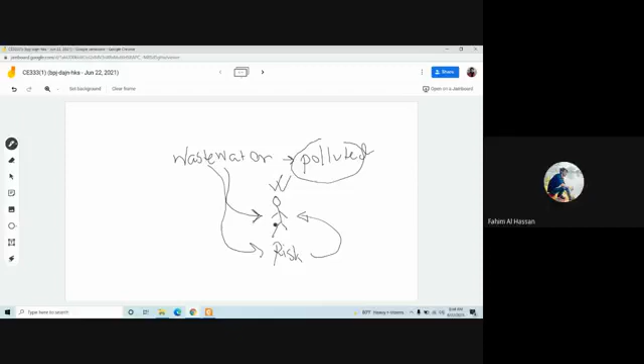Yes, sir. So wastewater can transmit disease. So we need to stop this transmission of disease. That means we need to stop the wastewater from being in contact with human beings.

That means we need to safely discharge it into the environment.

If we directly discharge this wastewater into a river, then the river is going to be polluted. The fish and other aquatic life will be in danger. And you know that a river directly affects the life of human beings. If the river is polluted, then the polluted river will also generate or cause disease.

If the wastewater contains heavy metal, then fish will consume it, and the heavy metal will go into the flesh of the fish. And if people eat this fish, then heavy metal will also accumulate in the body of the people, and eventually it may cause cancer and other fatal diseases.

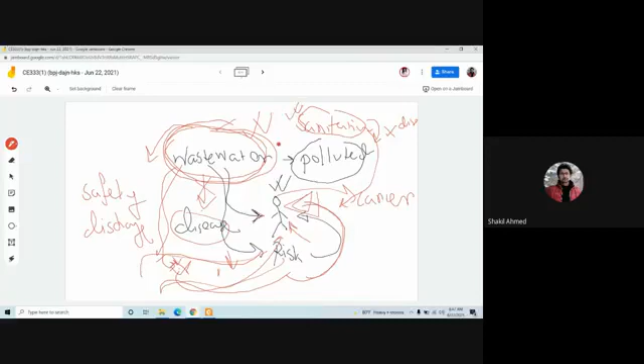Now look at this example. We supply fresh water to a building, right? Now you use it for many purposes, like in a wash basin, in the toilet, in the bathroom, in your kitchen. And once you use the water, then it becomes what? Wastewater. Once you use this water, it becomes wastewater.

Let's designate it by red color. So that's wastewater. That means you need to discharge this wastewater safely as soon as possible, right? And therefore, we need to transmit the wastewater from the source of generation to somewhere else, and treat it - that is, removing the pollutants - and then safely discharge it into the river. Did I make it clear? Yes, sir.

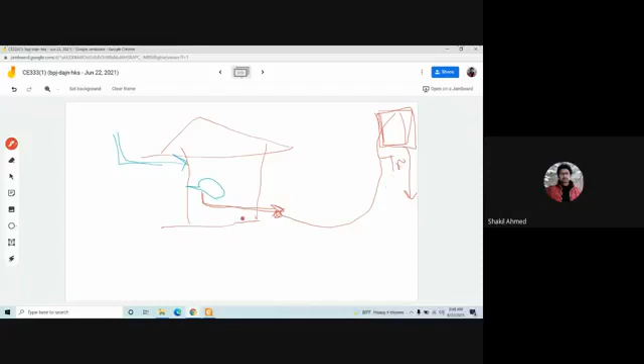Now, for example, the BOD here - you know what BOD is by now. BOD actually represents the amount of organic matter present in the water. So, for example, if BOD in this water is 50 milligrams per liter, the Bangladesh Environmental Conservation Rule (ECR) tells you the maximum limit of BOD of water to discharge into the river is around 5 to 6.

5 milligrams per liter - can you directly discharge this water into the river? No, sir, maximum is 5 to 6. You have 50. That means you need to treat this water, reduce it from 50 to 5 or 6, and then you can discharge it into the river. Clear? Yes, sir. So you have to know these rules and regulations from the Environmental Conservation Rule (ECR).

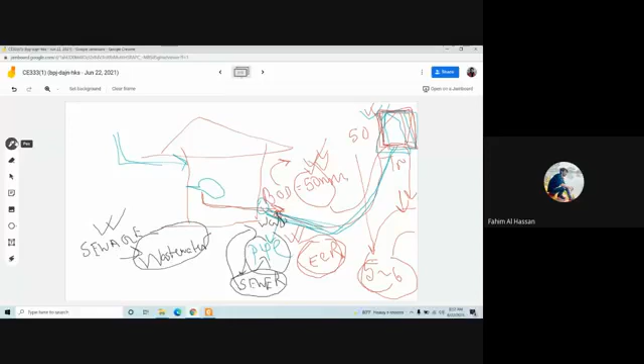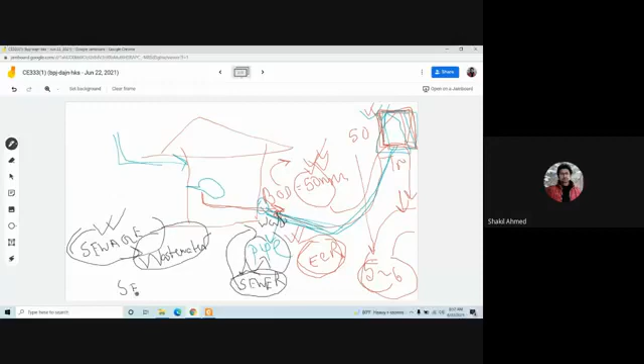Now, this wastewater is called sewage. So sewage is the wastewater, and sewer is the pipe which contains or transmits the sewage. Did I make it clear? Yes, sir. So together, this sewer and this sewage, this system is called sewerage. Clear? Yes, sir.

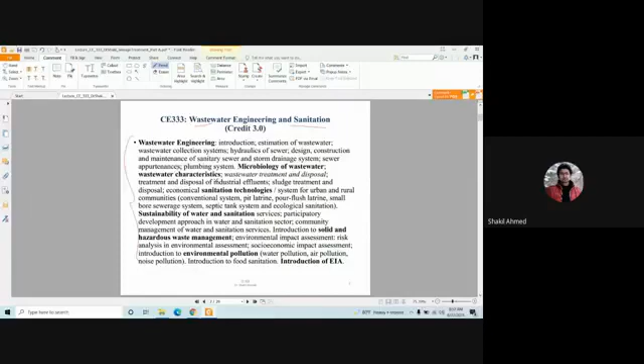So this is the course content. We'll learn these things, Inshallah. I already told you the references. We'll start from here.

Sanitation is one of the world's most urgent issues. The issue is lack of safe water, sanitation, and health. If you want to develop a country, you need to meet the water demand because it's related to child mortality and to the development of human beings directly.

So here comes the role of sanitation. Sanitation is defined as the access to and use of facilities and services for the safe disposal of human waste, so that this waste cannot harm humans. You need to safely dispose of it. That is sanitation.

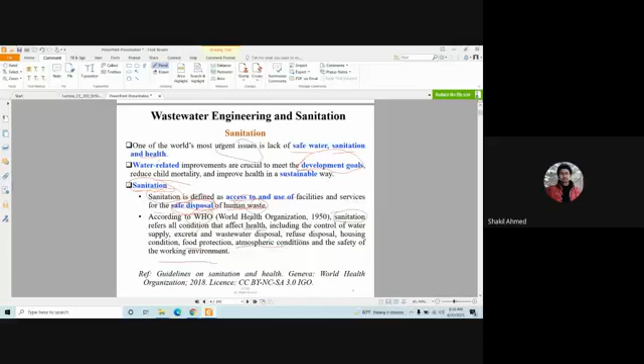According to the World Health Organization, sanitation refers to all conditions that affect health, including control of water supply, excreta and human solid waste, wastewater disposal, refuse disposal, housing condition, food protection, atmospheric condition, and the safety of the working environment. These are all part of sanitation that affect health.

Did you hear the name WASH? W means water, S means sanitation, and H means hygiene. Remember this terminology, you may need it while going for a job interview, test, or exams.

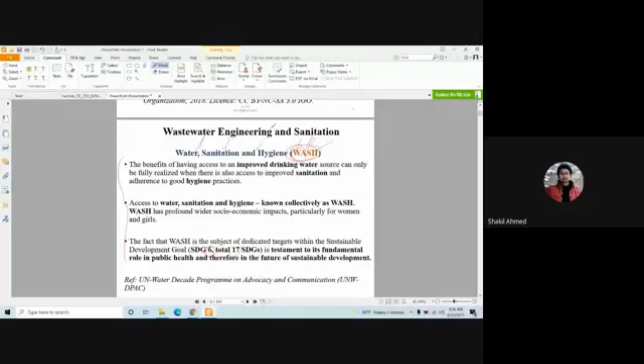The Sustainable Development Goals, SDGs of the UNDP, have a total of 17 goals. Goal number 6 is directly related to WASH, that means water, sanitation, and hygiene. So access to water, sanitation, and hygiene, collectively known as WASH, has profound, wider socio-economic impacts, particularly for humans, women, and girls.

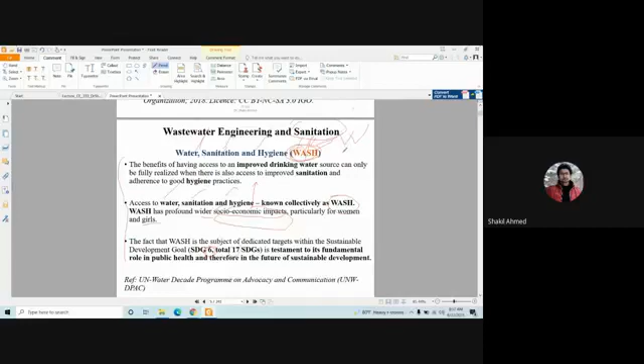So what is the motivation of sanitation? Sanitation has a profound impact on the socio-economic aspects of a country. If you want to generate money and develop a country, you need to protect the health of human beings, and without sanitation you cannot do this. That's why you need to invest money on sanitation. If you invest money on sanitation, you will get more in return.

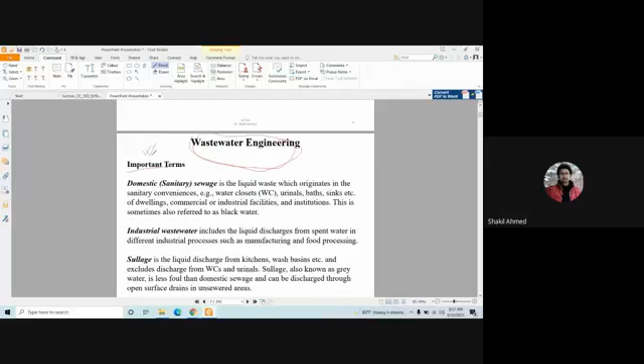So to meet the demand of sanitation, you need wastewater engineering. In this wastewater engineering, we will need to learn some terminologies.

First of all, domestic sewage. Sewage is wastewater, and domestic means it is generated from the household. Domestic sewage or sanitary sewage is the liquid waste which originates in sanitary conveniences - water closets (commodes), urinals, baths, sinks, etc. - of dwellings (residences), commercial or industrial facilities, and institutions. This is sometimes also referred to as black water.

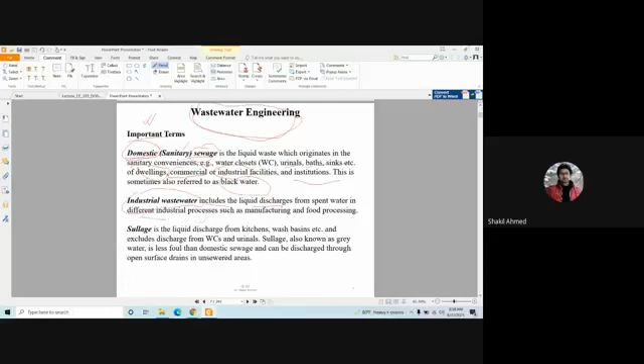Industrial sewage or industrial wastewater includes liquid discharge from spent water in different industrial processes like manufacturing and food processing. For example, you have a textile industry taking fresh water and doing processing - leather processing in a tannery industry. After processing the leather with water, that water becomes wastewater - this is industrial wastewater, which can come from leather, tannery, or textile industries.

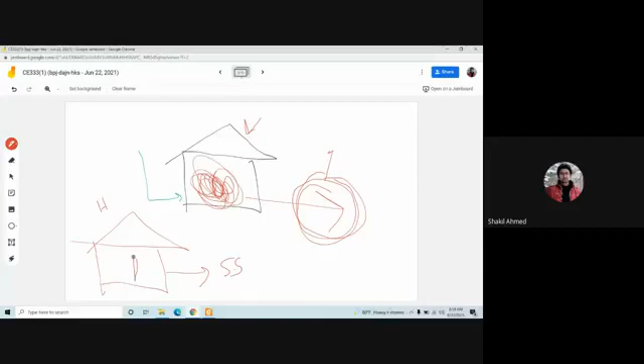From the household, if wastewater is generated from a household, a bank, a school, or an office, then this is sanitary sewage. In sanitary sewage, some wastewater is generated from the toilet and some from the kitchen. The wastewater generated from the kitchen is not as polluted as that from the toilet.

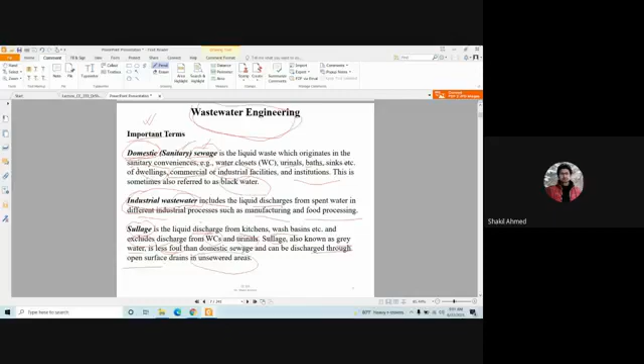This less polluted wastewater is called sullage, or grey water - liquid discharges from kitchens, wash basins, etc., excluding discharges from water closets and urinals. Grey water is less foul, meaning less polluted, than domestic sewage and can be discharged through open surface drains in unsewered areas since it is less polluted.

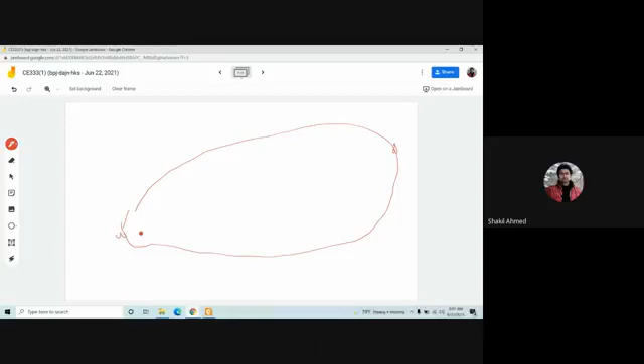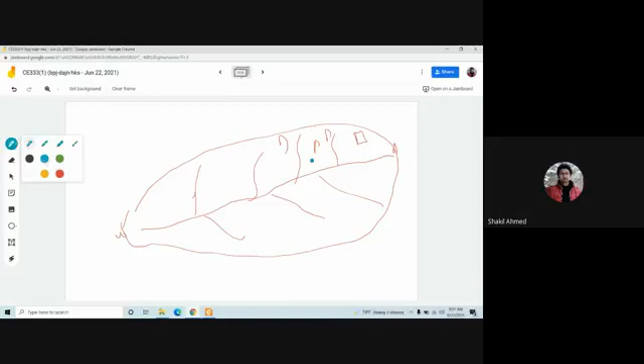Then storm water. For example, you have a community here - this is a watershed with high elevation and lower elevation, with buildings located throughout. Whenever there is precipitation, rainfall or snowfall, this rainwater will transfer from higher elevation to lower elevation. Basically, this is storm water.

It's also important to discharge this storm water as soon as possible. Otherwise, there will be flooding.

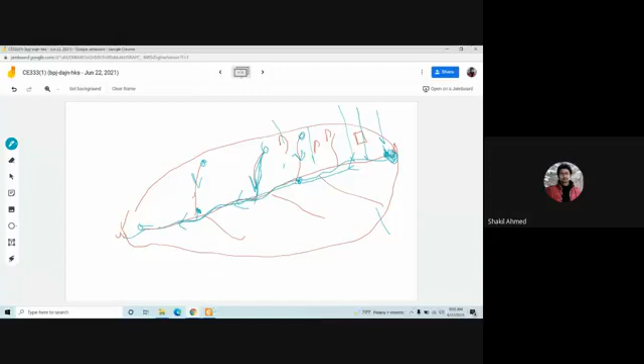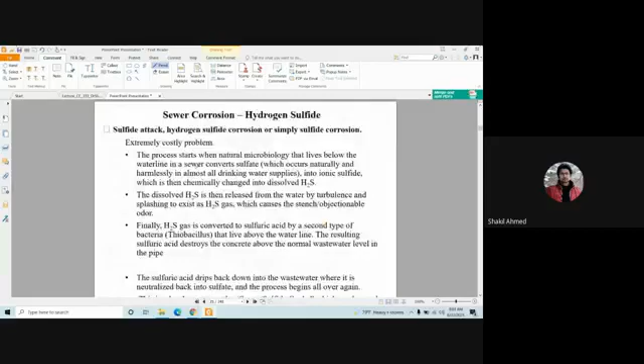Sewer, as I already told you, is a pipe or conduit. Infiltration is the water which enters the sewers from the ground through leaks or faulty joints. Let me show you another figure - this is a sewer coming from this house, collecting the wastewater from this house, and you have another house here.

That house is also discharging to another pipe, to this larger pipe. This larger pipe is for the sanitary wastewater, so that's called sanitary sewer. And this pipe, as you can see, blue color, is basically collecting the storm water, so this is a storm sewer. Clear? You are not mixing them. You are using two separate pipes or sewers to collect sanitary sewage and storm sewage.

Sometimes you may also combine them together. That means one single pipe that will collect or transfer both sanitary and storm sewage.

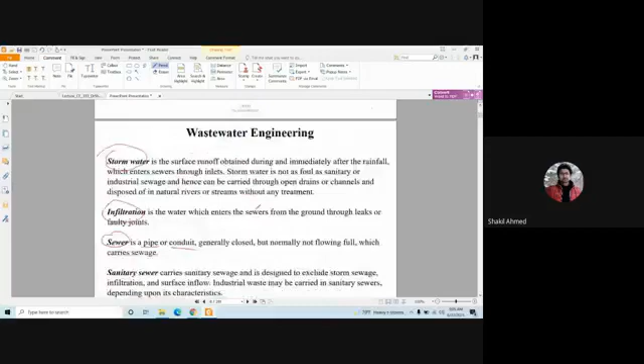Infiltration, okay. Sanitary sewer, I already told you what is that. Storm sewer, I already told you. Sewerage refers to the entire system of collection, treatment, and disposal of sewage through a network of sewers.

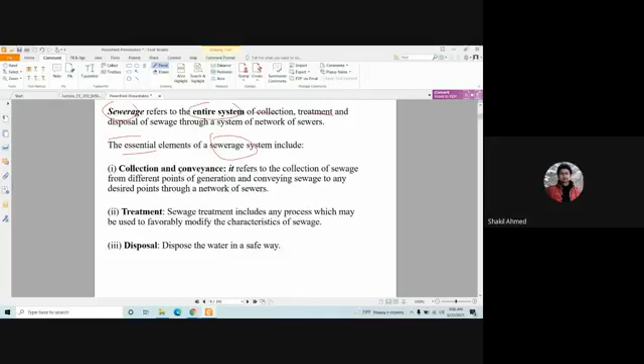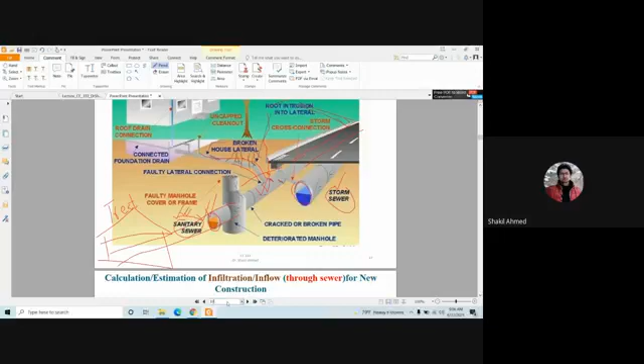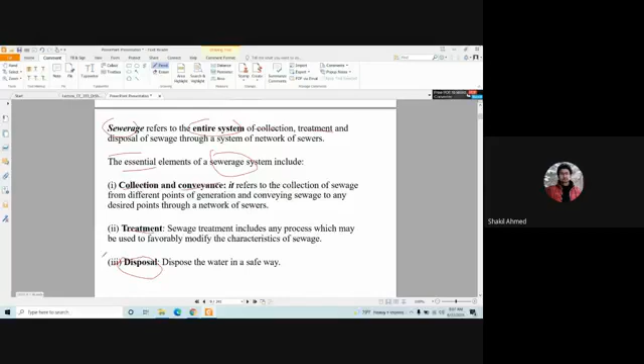So the essential elements of a sewerage system are collection and conveyance. That means first of all you need to collect the wastewater through this pipe, right? And then you need to transfer them to somewhere else. And then you need to treat that sewage in a wastewater treatment plant. These are the primary functions of a sewerage system: collection and conveyance, treatment, and finally disposal. After treatment, you have to dispose the treated water safely.

The typical figure of a sewerage system, as you can see, this is a sanitary sewer. Roof drain means the water falling on the roof is being collected through this gutter, and then finally discharged into the storm sewer. And the wastewater that's coming from the toilet and other areas is discharging into the sanitary sewer. Clear? Yes sir, okay.

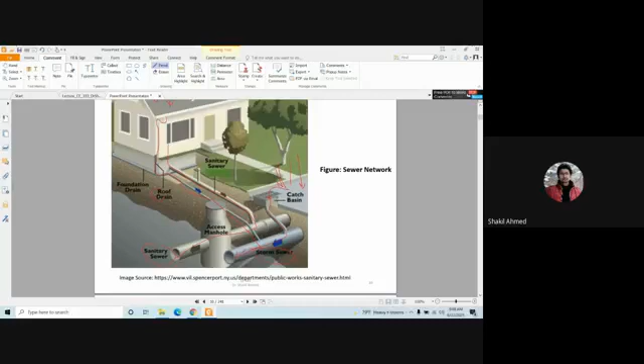And the rainwater that is falling here will be collected through this manhole into the storm sewer, right? Sometimes in the foundation areas you may have water seeping, so you are also collecting it and discharging it into the storm sewer.

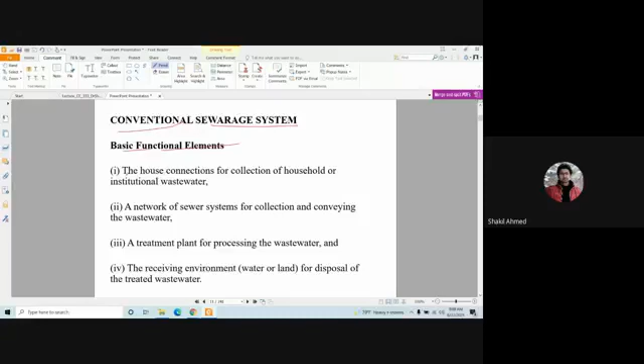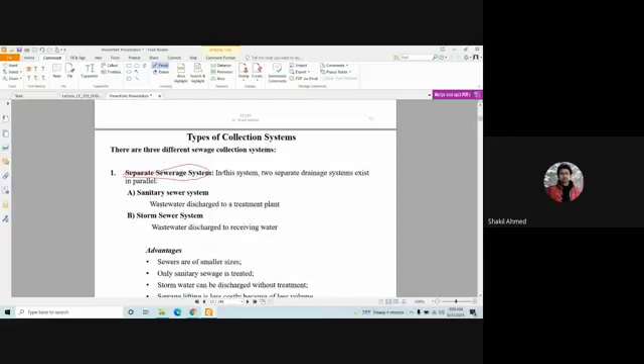Conventional sewerage system, basic functional elements - I already told you these things. Types of collection systems: separate sewerage system means, as you can see, you have a separate sewer for sanitary wastewater and storm wastewater. So this is a separate sewerage system. In this system, two separate drainage systems exist in parallel - one is sanitary sewer system and the other is storm sewer system.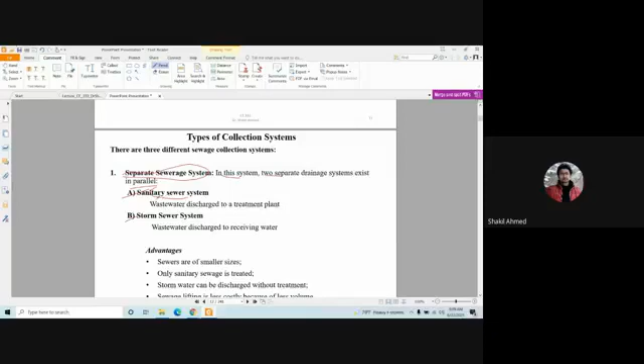Sanitary sewer system collects the wastewater and discharges it to a treatment plant. Storm sewer is not that much pollutant, therefore this is directly discharged to receiving water - that means rivers, canals.

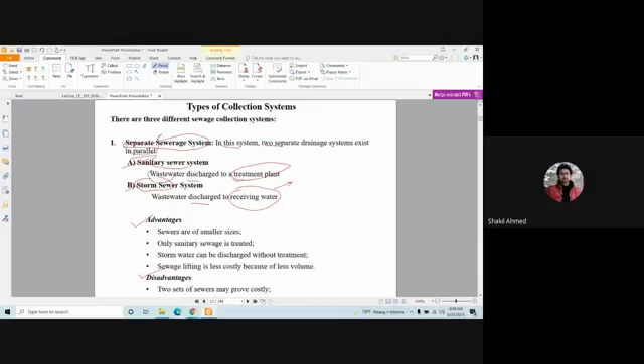Advantages and disadvantages: sewers are of a smaller size since you have two separate sewage systems, so the pipe diameter can be smaller. Only sanitary sewage is treated - that means you need to treat only the sanitary sewage.

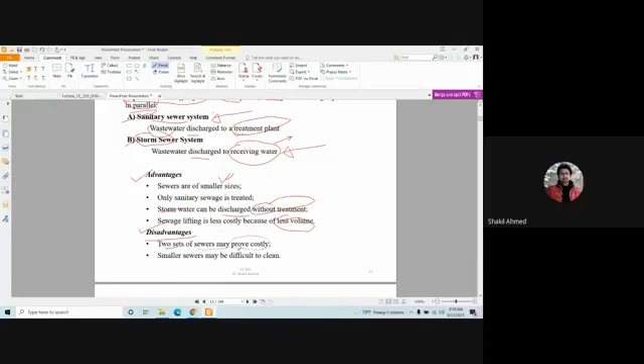You don't need to treat this storm sewage. Storm water can be discharged without treatment. Sewage lifting is less costly because of less volume. For the disadvantage, two sets of sewers may prove costly - that means here you have to lay out or construct two separate sewers, which might be costly.

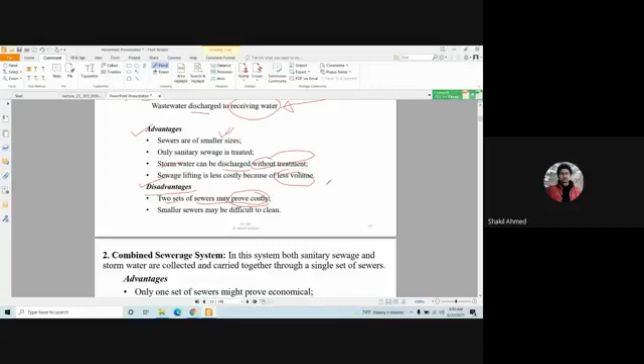Installation, and smaller sewers may be difficult to clean. If you have two separate sewers, as I told you, diameter will be smaller, but a smaller sewer is difficult to clean. Remember, this sewage contains liquid and solid, right? So this solid may get deposited sometimes here and create blockage. So you need to clean it regularly through the manhole. Did I make it clear? Yes sir, okay.

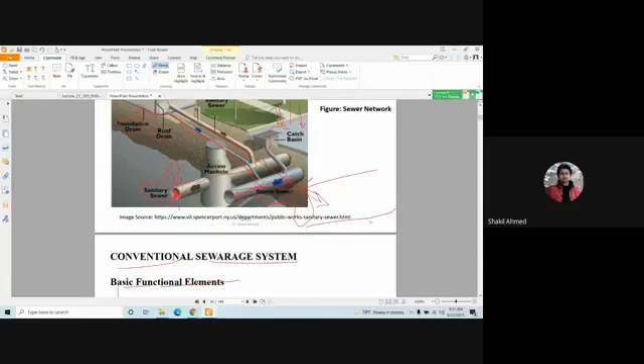Now, combined sewerage system: in combined sewerage system you will have only one bigger pipe basically, so all the wastewater from sanitary as well as the storm water will be discharged into this bigger single pipe - that is combined, meaning you have combined them together. You should go through this advantage and disadvantages.

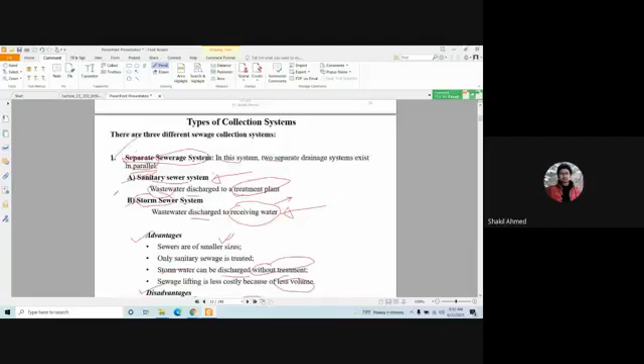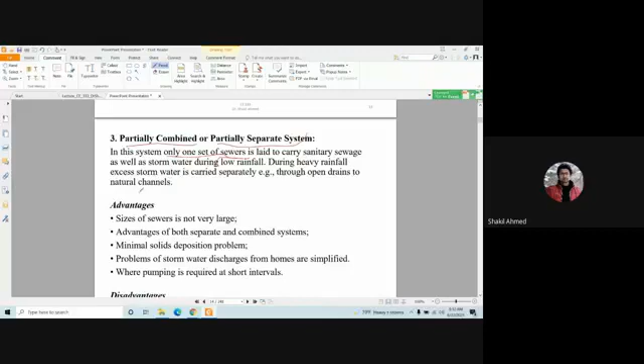Partially combined or partially separate system - what's that? It has the property of both one and two. In this system, only one set of sewers is laid to carry sanitary sewage as well as stormwater during low rainfall. During heavy rainfall, excess stormwater is carried separately through open drains to natural channels. That means you have this sewer, okay?

But when there is a rainy season, the rainwater or stormwater will be much higher, and as a result the water will overflow. The excess water will be transferred through an open drain. Did I make it clear? Yes, sir. You will have a system here that can transfer the excess rainwater or stormwater.

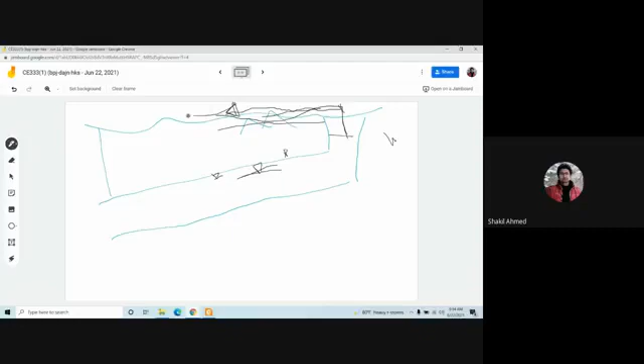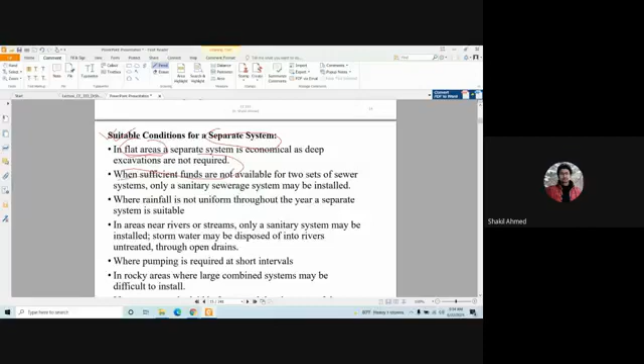Suitable conditions for a separate system. In which condition will you give a separate system? In flat areas like Bangladesh—Dhaka, Rajshahi—and not hilly areas like Sylhet or Chittagong. In flat areas, a separate system is economical as deep excavations are not required.

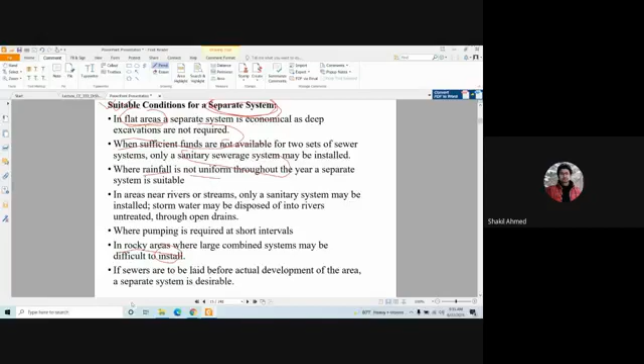When sufficient funds are not available for two sets of sewer systems, then only one sanitary sewer system may be installed. Where rainfall is not uniform throughout the year, a separate system is suitable. In rocky areas, a large combined system may be difficult to install. And if sewers are to be laid before actual development of the area, a separate system is desirable.

Suitable conditions for a combined system: where rainfall is uniform throughout the year, a combined system is economical. Where pumping is required for both sanitary sewage and stormwater. Where sufficient space is not available for two sets of sewer systems.

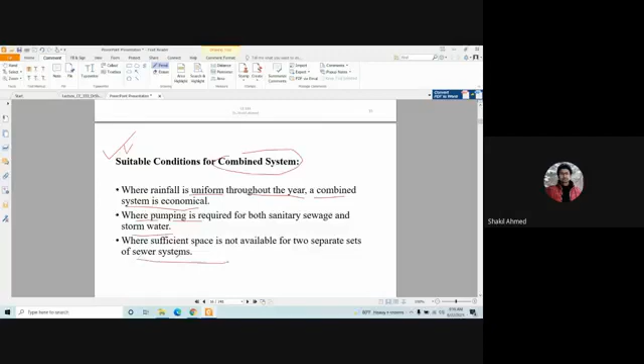Now, types of sewers. This is important to know. The types and size of sewers vary with the size of collection systems and the location of wastewater treatment facilities. The principal types of sewers found in most collection systems are building sewers and lateral or branch sewers. What is a building sewer? Also called house connections, used to convey wastewater from the building to the lateral or branch sewer. It normally begins outside the building foundation. I'll show you the picture, then it will be clear.

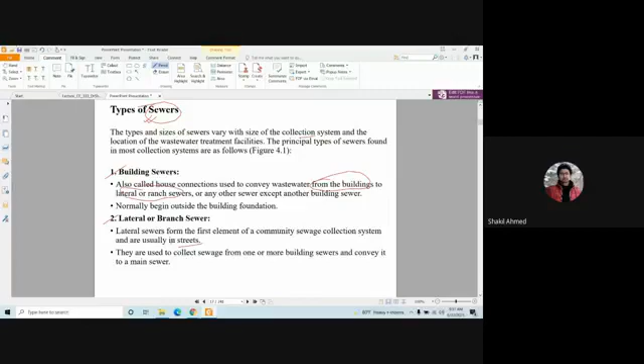What is a lateral sewer? Lateral sewers form the first element of a community sewage collection system and are usually in streets. They are used to collect sewage from one or more building sewers and convey it to the main sewer. Let's look at this now—what is a building sewer, what is a main sewer?

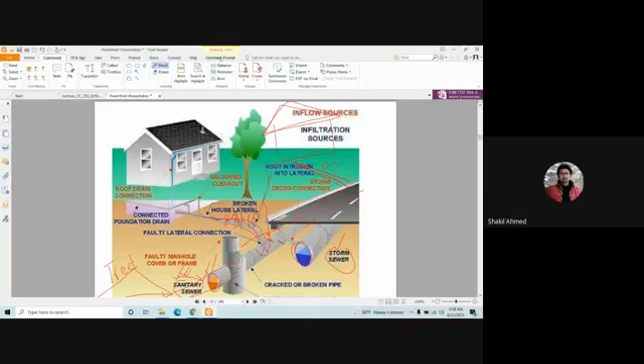Look at this, are you following me, guys? Yes, sir. This pipe is collecting the wastewater from the building or house. This is the building sewer. This is the building here. As I told you, another building here is discharging through this pipe. So this is a building sewer again. Multiple building sewers, like this one and this one, are discharging into this lateral sewer.

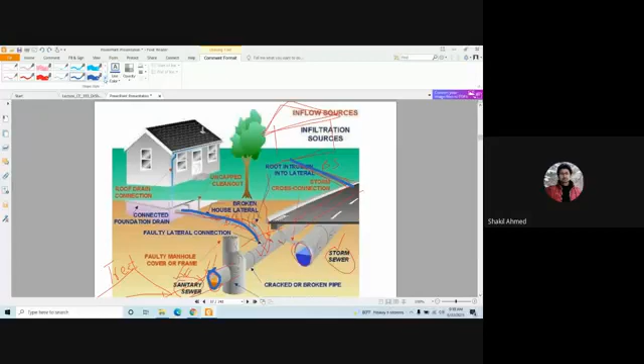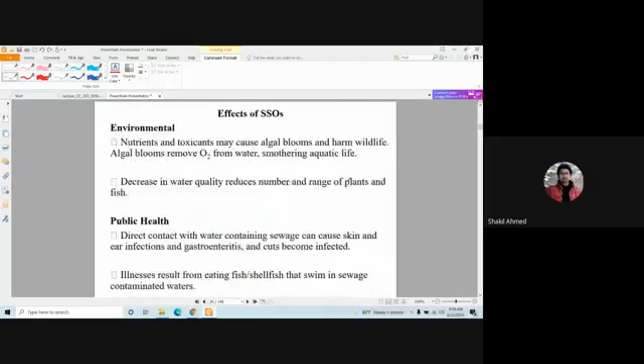This is the lateral sewer. Did I make it clear? Yes, sir. Or branch sewer. So the building sewer discharges where? To the lateral sewer, right? And there is this building—this is the building sewer, the building sewer.

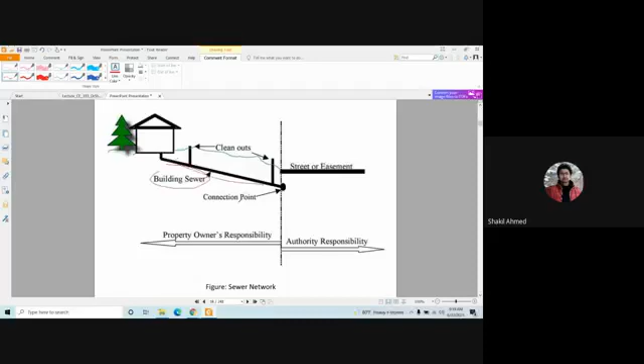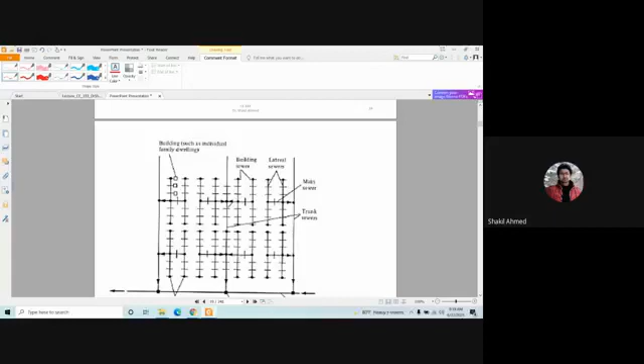Now let's look from the top—so basically you're looking at the plan view. This is a building, this is another building, this is a building, this is another building. Are you following me, guys? Yes, sir. So this building is discharging through the building sewer here. This building is discharging through another building sewer here. This building is discharging through these here. This building is discharging through this one here. Clear? Yes, sir.

There is another building here, and here. Multiple buildings, multiple building sewers like this one, this one, this one, and this one, are discharging where? To this lateral sewer. So this is the lateral sewer. Alright? Yes, sir. The lateral sewer.

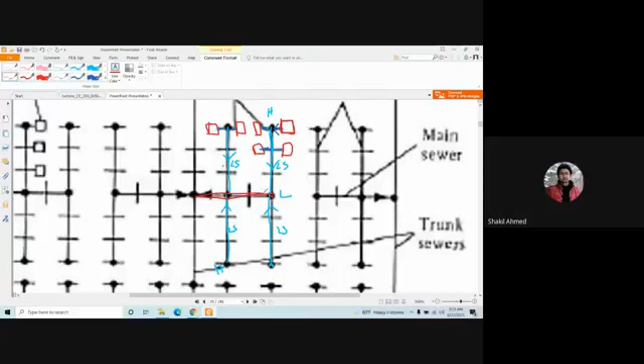Now all these lateral sewers—this one, this one, this one, this one—they are discharging to where? They are discharging to another pipe that's called the main sewer. The pink color that you are looking at here, that is the main sewer. That is another main sewer. This is a main sewer. These laterals—this one, this one, this one—they are discharging into a relatively bigger pipe, called the main sewer. Clear? Yes, sir.

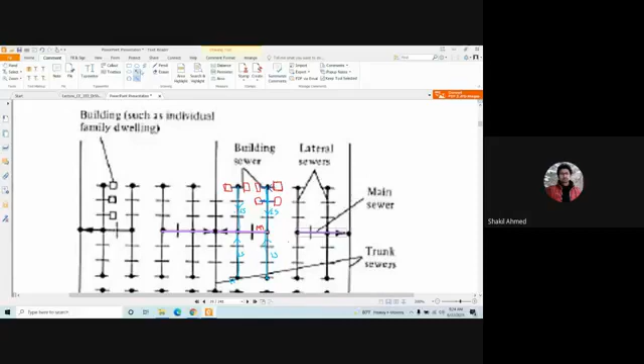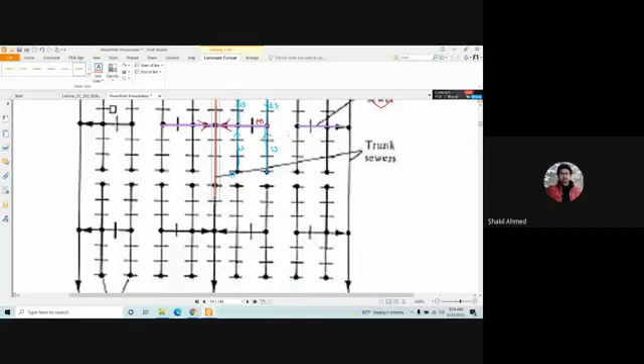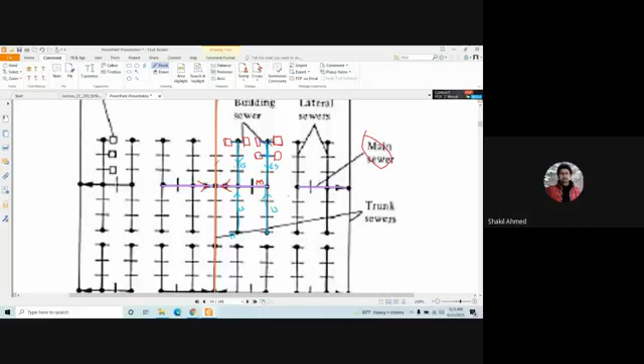As you can see, similarly this one is a main sewer. This one is a lateral sewer. Now this main sewer and this main sewer are discharging into another bigger pipe, called the trunk sewer. So these main sewers, this one and this one, are discharging into this bigger size pipe called the trunk sewer. Clear? Yes, sir. Trunk sewer. And finally, by the way, there is another trunk sewer.

This is another trunk sewer. This is another trunk sewer. This is a main sewer, the main sewer. This is a main sewer. This is a main sewer.

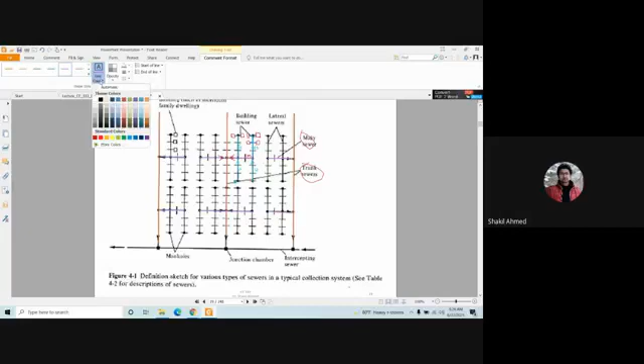And these are basically the lateral sewers.

So, what we have seen so far is that from building sewer to where? From building sewer, the blue one, to what? Lateral sewer. From lateral sewer to where? The main sewer. From main sewer to trunk sewer. From trunk sewer to...

That is called the intercepting sewer, the final one. And this intercepting sewer finally collects the water from this lateral sewer, this trunk sewer, this trunk sewer, and finally discharges the wastewater to the water treatment plant, the black one.

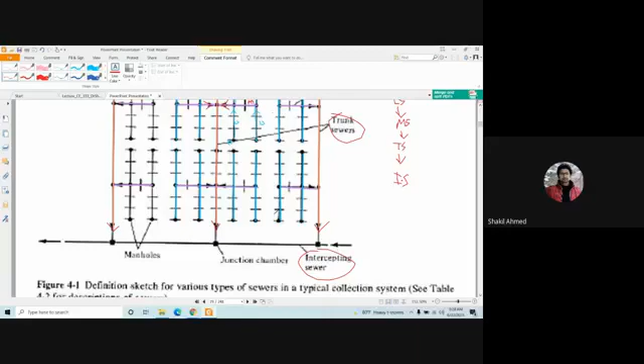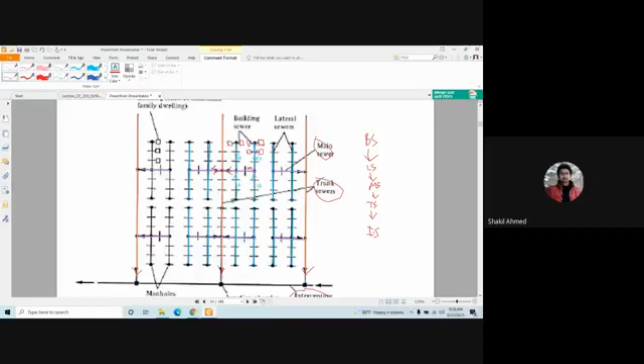Now, usually we make this gravity flow, so higher to lower elevation, and this pipe sometimes may need to be maintained, like cleaning and other purposes. So always remember that this pipe system is under the ground. Am I right?

Yes sir. So this pipe system or pipe layout must not be under any building. Otherwise, if there is a building and there is a blockage here, can you maintain this pipe? No, you cannot access the pipe. Can you destroy or break this building to maintain this pipe? No, that's not possible. So you have to remember that your pipe layout must not be under any important structure or any building. Did I make it clear?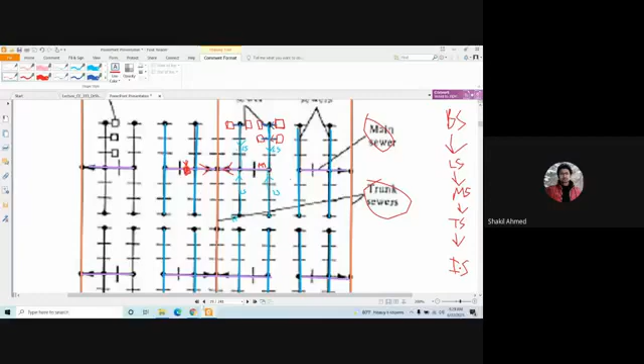Yes sir. That means your pipe system must follow the road network. That means, if I show you here, look at this. This is a building, right? This is another building, another building. Can you see this?

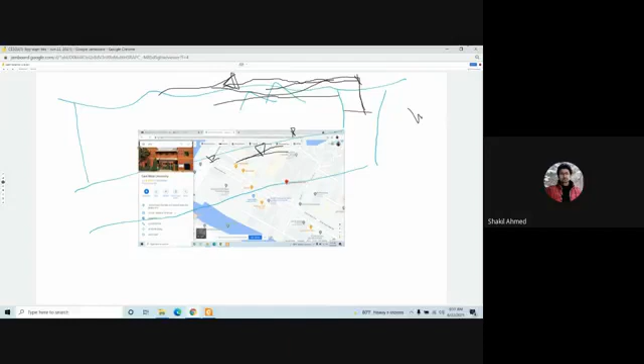Does it allow me to write it here? Okay, that's okay, no problem, I can show it from here. So your pipe layout should follow the road network. That means this is the road, right? This is the road, so your pipe network should follow this road layout like this. You cannot lay out your pipe here.

So what I'm trying to say here: look at this, this is the road, right? Yes sir, this is another road. These are buildings. So your pipe layout should follow this road network, and then the bigger road.

You cannot lay out your pipe under the building, can you do that? You cannot lay out your pipe under the building. You have to follow the road network. Is it clear? Yes sir.

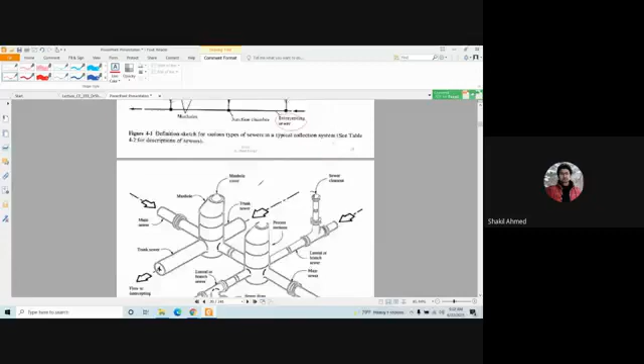We have learned these things. It's the same thing. And in these junctions, like here, here is a junction, here is a junction, here is a junction, right? These junctions are susceptible to clogging because they get flow from different directions. That's why you may need to clean these cloggings on a regular basis, so you need to keep provision for cleaning, that means a manhole. This is the junction I was talking about.

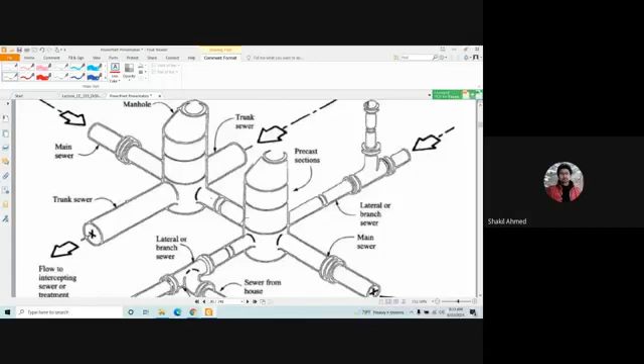Okay, like this is the lateral sewer, this is the main, and this is the manhole. So the ground surface is here, maybe 6 feet above. So you should keep provision so that a person or a robot can go there and clean the cloggings or blockage. Clear? Yes sir.

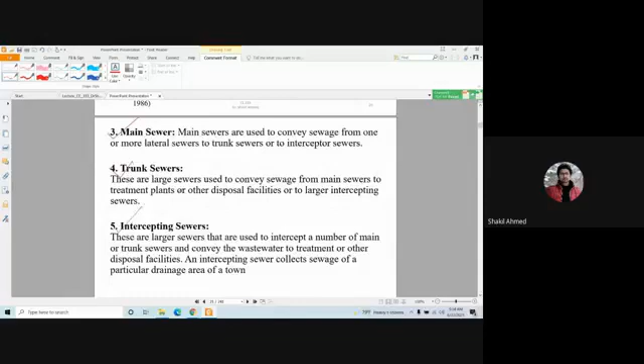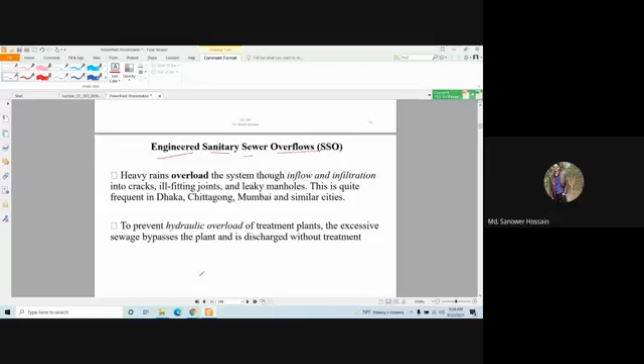And now you know what's main sewer, trunk sewer, intercepting sewer, engineered sanitary sewer overflow. Sometimes, yes, the intercepting sewer is the final sewer that basically conveys the wastewater to the treatment plant and other disposal facility.

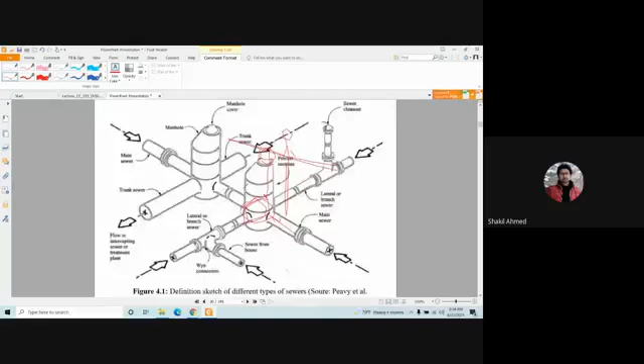Sanitary sewer overflow, what's that? If, for example, you have designed this sewer for a maximum of 10 meter cube per second, and now if your real flow is 11 meter cube per second, then this pipe will not be able to meet the demand. In that case, the water will overflow in the street through the manhole. Am I right? Yes sir. And that wastewater will then go into the roadside network and then may go to the river, pond, and eventually will pollute the environment, posing risk to humans and other aquatic life.

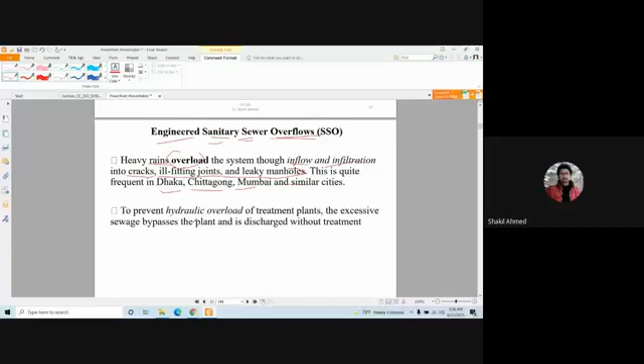So heavy rains sometimes may overload the system through inflow and infiltration into cracks, ill-fit joints, and leaky manholes. This is quite frequent in Dhaka, Chittagong, Mumbai, and other cities. To prevent this overload of treatment plants, the excessive sewage bypasses the plant and is discharged without treatment. It's not a good option, but sometimes you have to do this.

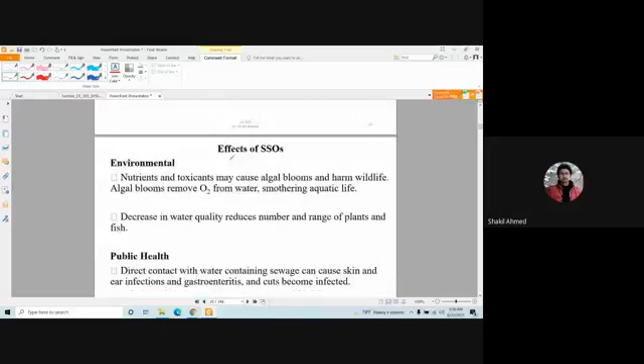And because of this pollution, nutrients and toxicants may cause algal bloom and harm wildlife and aquatic life, as I told you. Decrease in water quality reduces the number and ranges of plants and fish, and public health is also hampered because direct contact with water containing sewage can cause skin and other diseases.

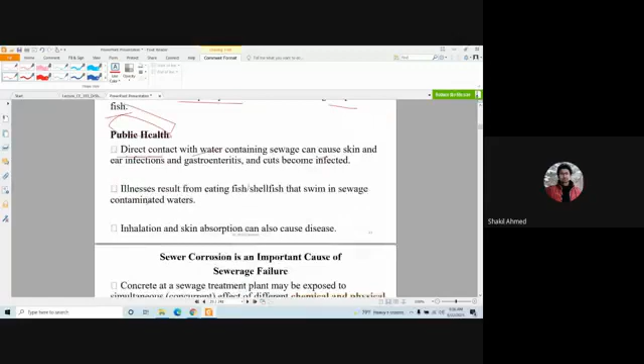Okay, any questions, guys? Any question? No, sir.